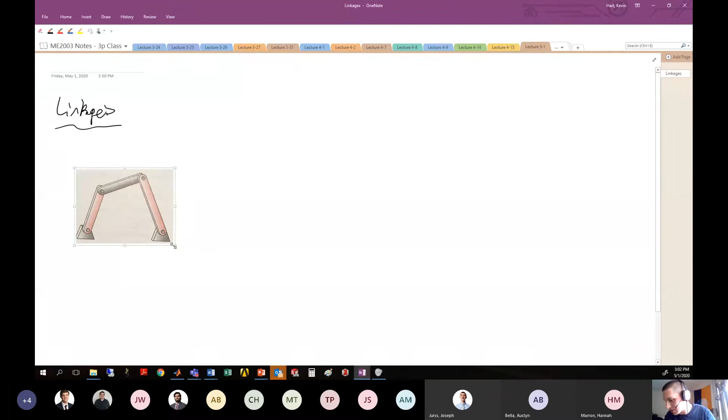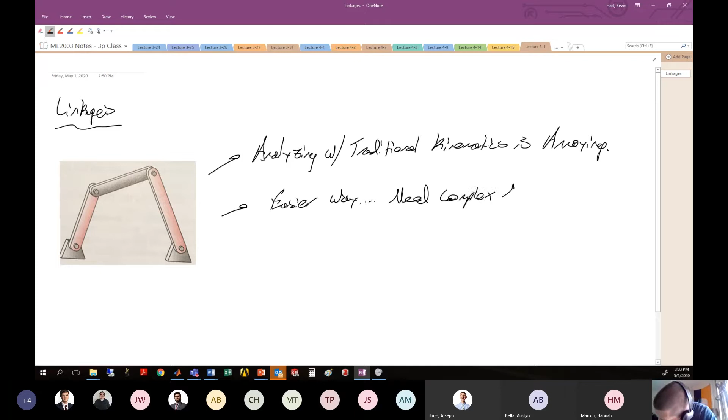Linkages. Remember what linkages look like. Just to jog your memory, we're looking at something generally like this. This is the most generic linkage you could think of. And we said that analyzing these with traditional kinematics is annoying, and as soon as we start adding links, it's going to be more annoying. So there's an easier way, but we need complex math. We had a lesson yesterday on complex math and how we might define position, velocity, and acceleration using complex notation. So here's a quick review.

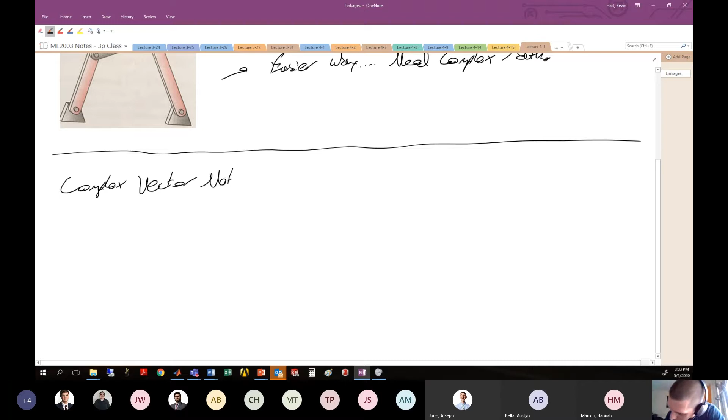The complex vector notation takes place in the complex plane, which looks a lot like your traditional Cartesian XY coordinate system, except now we replace the x-axis with the real axis and the y-axis with the imaginary axis. So if we have 2 points, point A and point B, and we want the position vector that locates B from A, let's say that is this vector here.

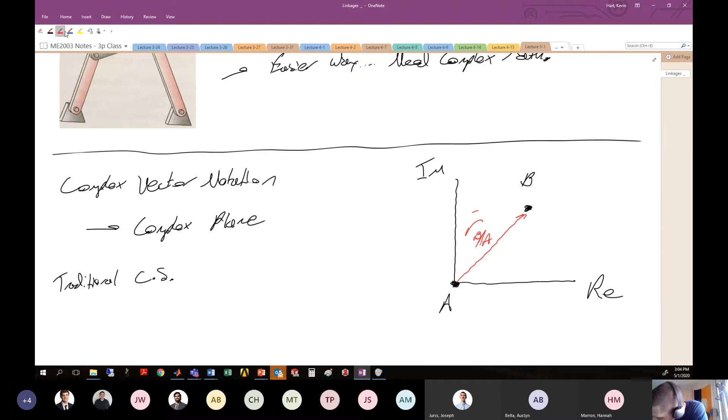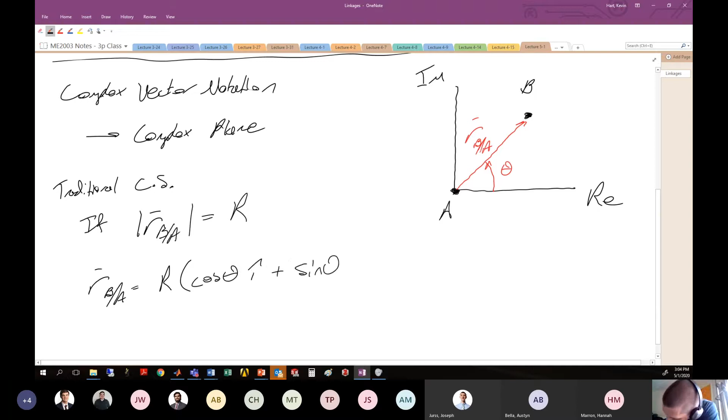Then in a traditional coordinate system, if the angle with the horizontal is theta, and the magnitude of this position vector is capital R, then the position vector which locates B from A is R times cosine theta I hat plus sine theta J hat. And everyone's happy. The world is good. And when we move to complex notation, it ain't that hard, right?

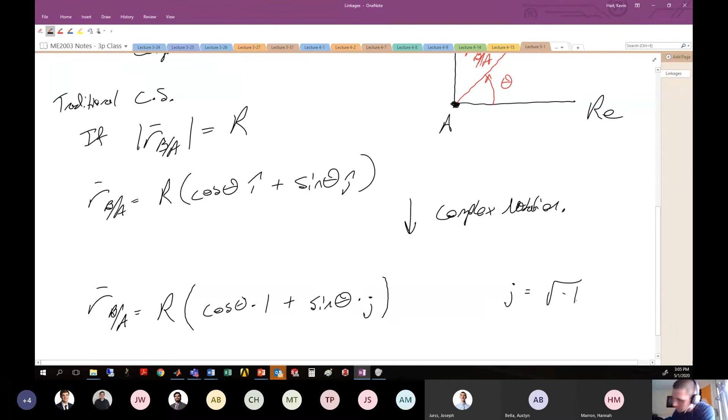All we have to do is replace the I direction with the value of 1 and replace the J hat direction with the J variable, which is the imaginary unit. So here, RBA has the same magnitude R, except it's cosine theta times 1 plus sine theta times the unit vector representing the imaginary direction, which is j, where j is equal to square root of -1. We use j in this class because your book uses j. Not the best reason, but that is what we do.

So this was our complex vector notation with real and imaginary components. We can rewrite this using Euler's formula. If you took anything away from lecture yesterday, I hope it was Euler's formula: e to the j theta is equal to cosine theta plus j sine theta. With that rewrite, the position vector locating B from A is the magnitude r times e to the j theta. This was our most simplistic complex vector notation. Is that an oxymoron? Simple complex notation.

All right, specifically for a position vector. So there we were. A position vector that locates B from A is the magnitude of that vector multiplied by e to the j theta, where theta is the angle that that vector makes with the horizontal. Now, this looks a lot like polar coordinates, and so if you've got a lot of experience with polar coordinates and you like polar coordinates, then this should look comforting to you or similar in scope to polar coordinates.

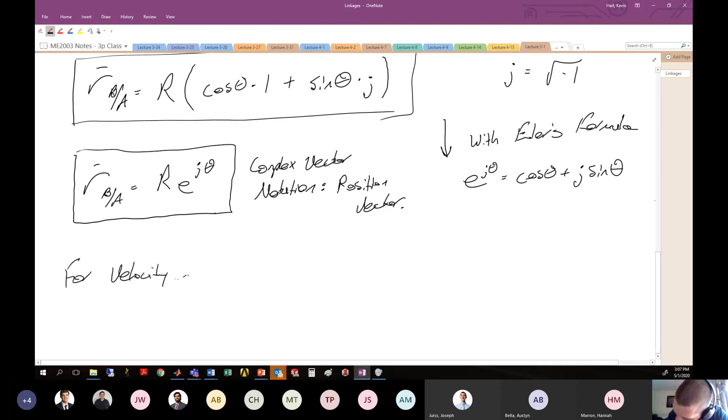So now we want to move from position vector to velocity. So for velocity, we take this guy and we take the derivative with respect to time. And the time derivative of this guy is easy. That's why we write it in this particular notation, because the derivative of an exponential is simple. So then we have the velocity of B relative to A is the derivative of this guy, which looks something like R j e to the j theta. And by the chain rule, there's a theta dot hanging on the back end here.

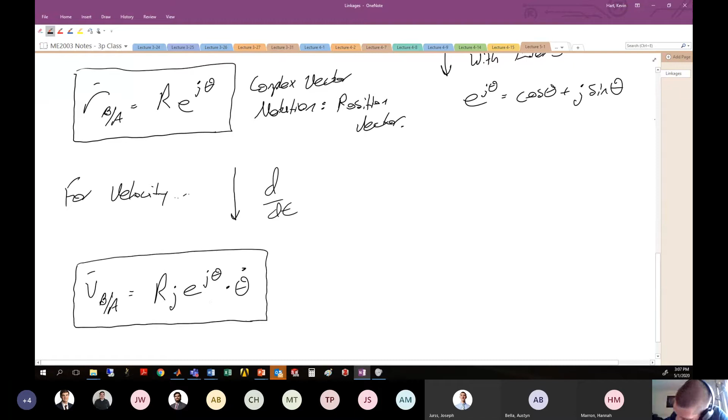So this was the velocity vector. And here we have the magnitude, R times theta dot, which looks a lot like R omega. So that's your magnitude. And then our direction is given by all of this mumble jumble here. So it is a vector. It has magnitude and direction, though it doesn't look like a traditional vector that you might be used to.

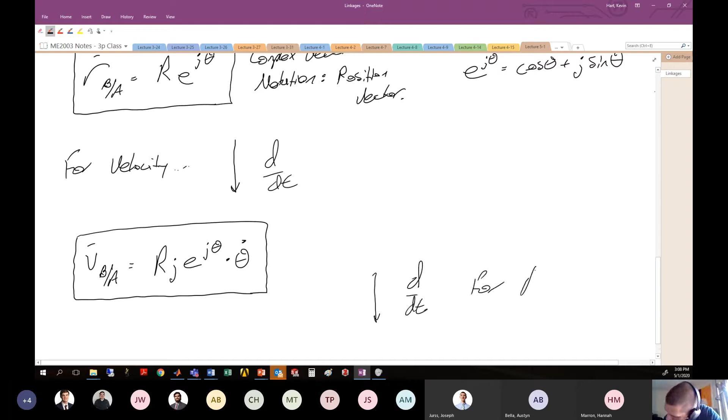Take one more derivative for acceleration. So we could then write that the acceleration of B relative to A, after doing this derivative, looks something like R theta double dot times j e to the j theta minus R theta dot squared e to the j theta.

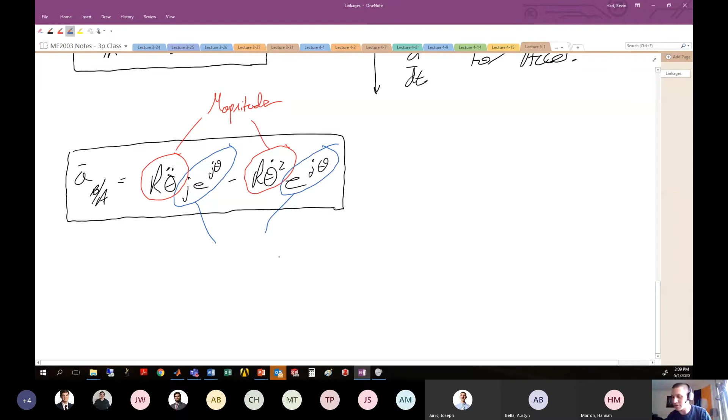And this was our complex vector notation for the acceleration of B relative to A. Notice here that this also has magnitude and direction. Here is your magnitude. Here is your magnitude. And here is what would define your direction. So there's that. You can also notice in this particular equation that there are flavors of things that you saw with your kinematics. What do I mean by that?

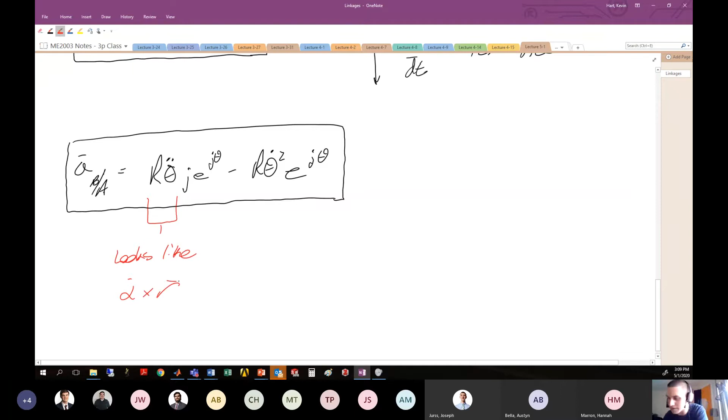You can also see here that this guy here looks like alpha cross r. So the magnitude of alpha is theta double dot, magnitude of r is capital R. And this looks like omega cross omega cross r. So remember, the magnitude of omega is theta dot. The magnitude of r is capital R. So we have capital R times theta dot squared, which would come from that particular component.

So we have this tangential term and this centripetal term that still pop their heads up. Though it looks funky because it's in this complex vector notation, I promise you that everything is there. So that was the lesson that we went through yesterday. All of these things will be useful when we go towards looking at the analysis of our linkages. So let's dive in on linkage analysis.

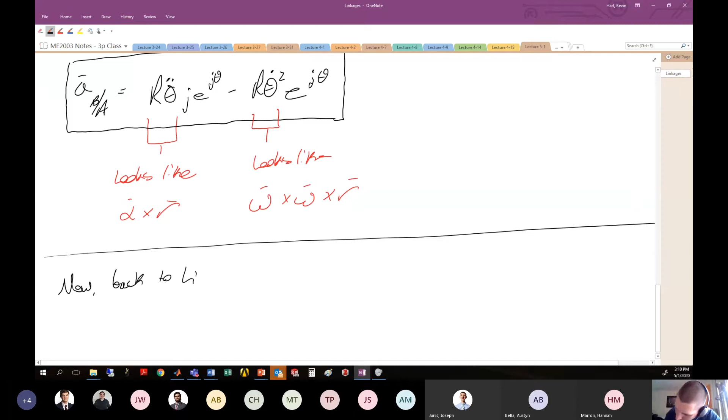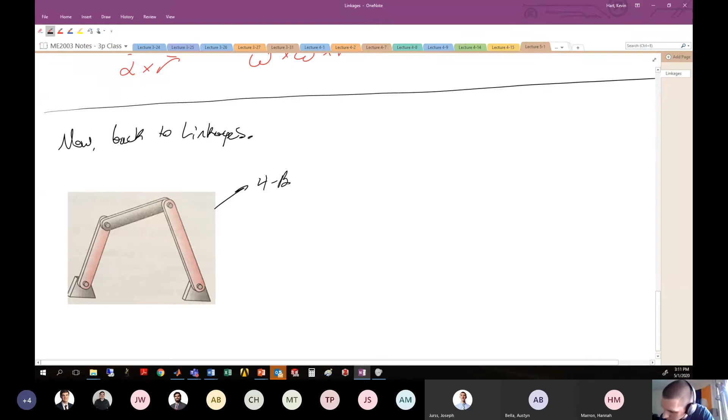Now back to linkages. And remember what our linkage looks like. This here is a 4-bar linkage. And in this class, we're going to stick with analysis of 4-bar linkages. You look at this and you say, what the F? This has only 3 links. Why is it called a 4-bar linkage?

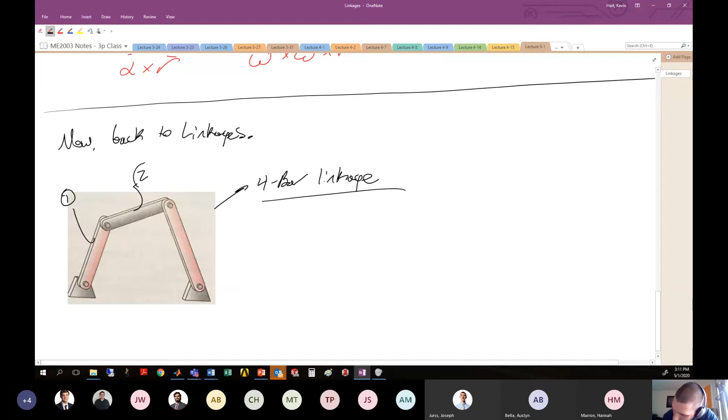Well, it's kind of a nomenclature thing. The links that we have here are, obviously, link number 1, link number 2, and link number 3. And by convention, the way that we define the 4th link is the link that exists between the 2 fixed points. So we have to imagine that there's a 4th link in this system that exists between these 2 points, and that is link number 4. So when I said 4-bar linkage, there's this imaginary 4th link. So 3 free links, and 1 fixed between pins. This is a 4-bar linkage.

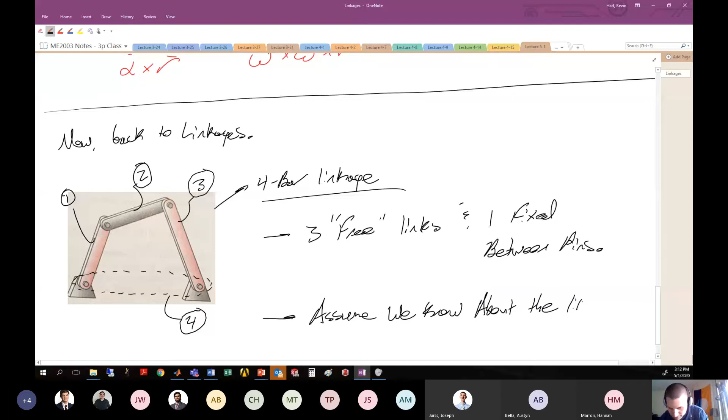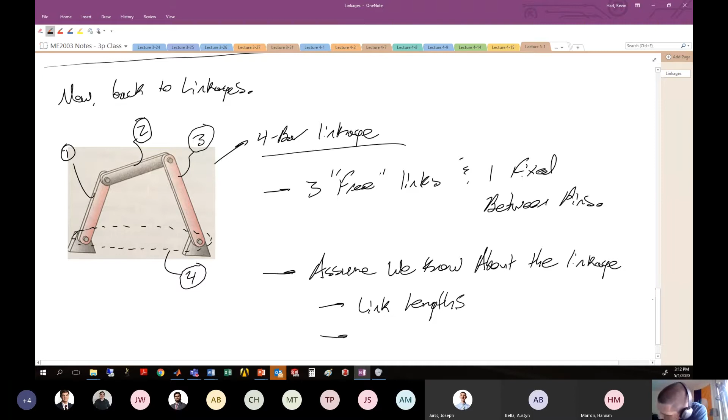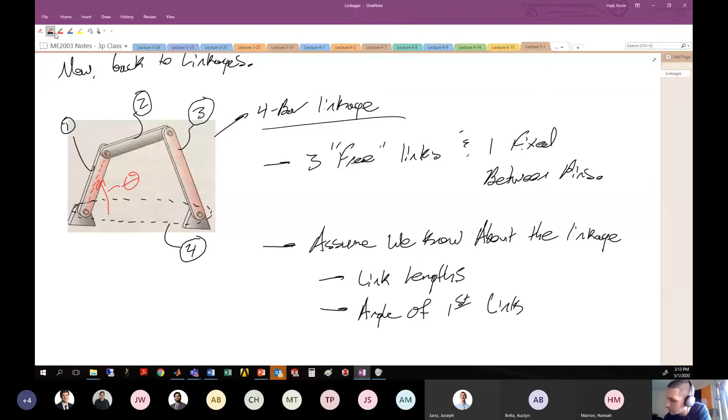Usually with these linkages, we will assume we know the following about the linkage. We'll assume we know the link lengths. We're going to know the angle of the first link. So that is the angle that this particular link makes with the horizontal, this angle theta. We're going to assume that we know what that is, usually because that particular link is being driven by a motor. We'll also assume that we know the angular velocity and acceleration of the first link.

Right. The reason that we can assume that we know these things is because usually the first link is driven by a motor of some kind. All right, so what I mean is this link in the chain, this guy here, is usually driven by some motor. And if you remember back to our examples before,

we saw that to be true with the motor example from way back in the day, which was here. So remember one of the linkages that we did way back in week number 3. In this situation, we had that exact scenario. We were assuming that this link AB was being driven by some motor. So we knew that this had some angular velocity here that was given in the problem. And we're also given its particular snapshot in time of what the angle was of this particular position vector RBA.

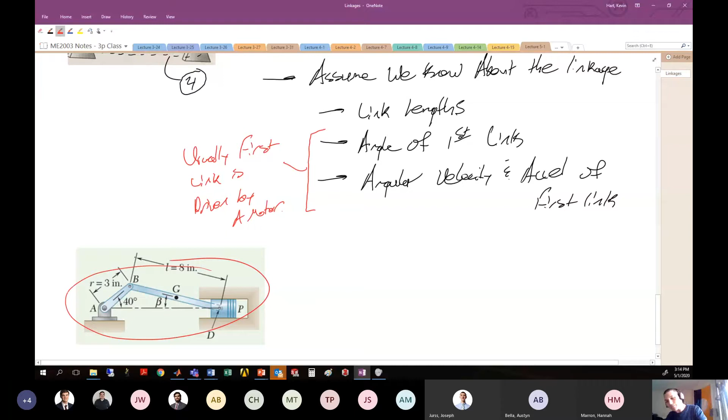All right. So that's how most of these systems work. And you'll notice here that this is a 4-bar linkage that is being used to drive this piston system, right?

So that is that. All right, now go away. Go away. Goodbye. All right.

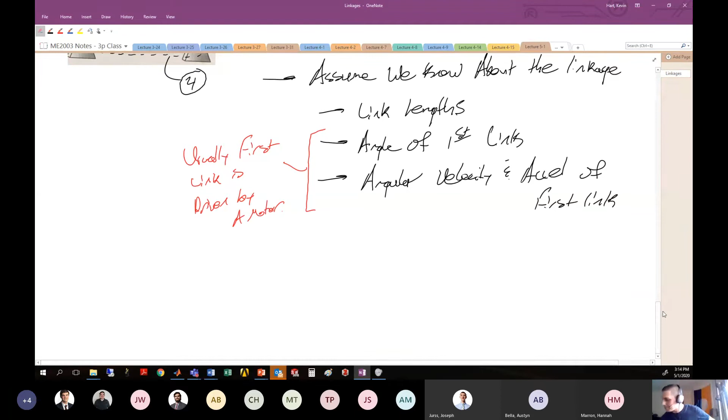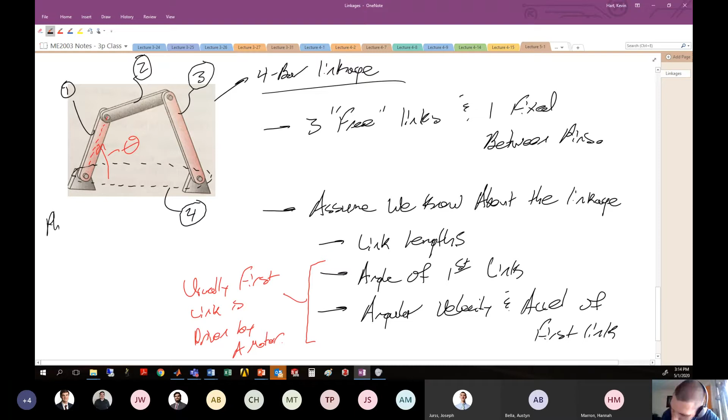So that's the idea. This is like a physical representation of what's happening. Now we actually need to come up with a mathematical model for what this looks like theoretically so that we can start to do some analysis on it. All right. So this is the physical system. Bang. Now we need a model. And that model of the system is going to be based in our real and imaginary coordinate system.

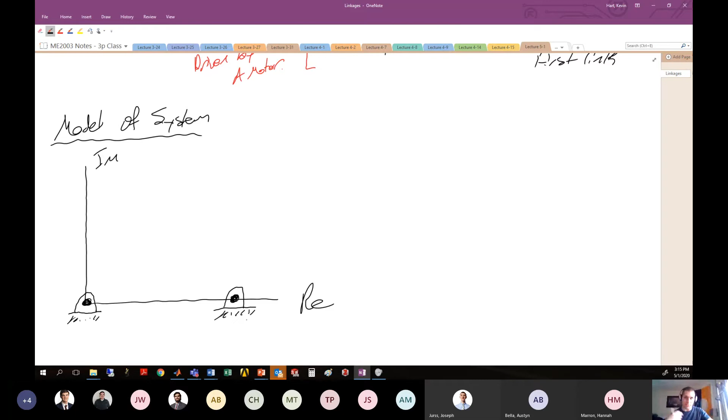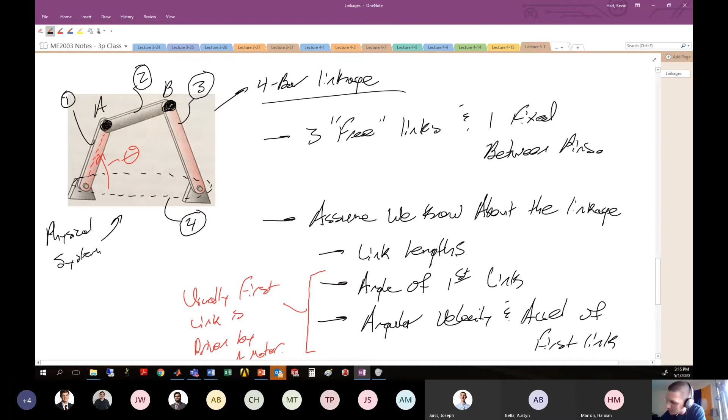All right. So down here at the bottom, this is where our first fixed point is assumed to be. We have another fixed point over here where everything ends up connecting. And then we have these arbitrary links that are in space. And the way that we're going to define these positions or these links in space is with position vectors. So if we go back up to this general linkage over here, and say that this is point A, and this here is point B, then we can define in space the points A and B appropriately. And we're going to define them in some generic general position.

So we can see here that we'll have some position vectors, like let's say here's a vector that locates A. We have a position vector that locates B from A. And we also have a position vector that locates B from this last final link here as well. All right, so these are all the vectors that we're going to use to do our analysis. So let's give some actual names to these guys. So let's say that this first vector here, going from the first origin to point A, is the position vector. By nomenclature, this is R2.

I'm going to try my best not to be annoyed, but whoever came up with the standard nomenclature for these linkages is just a dumbass. Okay, there's no other way to put it. Whoever defined how to define these position vectors and how to go through this nomenclature was just a freaking moron. So apologies for how these variables are defined, but they're horrible.

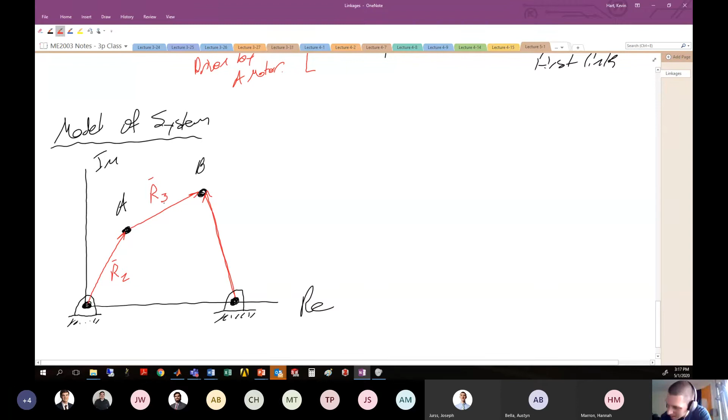So this is position vector 2, which locates A from this general origin. Here is position vector 3, which locates B from A. We have here, by nomenclature, position vector number 4. And you're asking, well, where's position vector number 1? Well, that is the position vector that locates the fixed secondary point from the fixed first point. So here we go. This is the position vector R1. Why they did it this way, the world will never know. So here are these position vectors.

I told you that we're going to assume that we know what the link lengths are. And by nomenclature, the links have the following lengths. The position vector R2 has link length little a. Oh, God, terrible. All right, the position vector R3 has link length little b. God, it just makes me laugh. The position vector R4 has link length little c, and the position vector R1 has link length little d.

Why? Like, why would you do it this way? Why does position vector R2 not have length little b? And position vector R3 have length little c? It just makes no freaking sense. Whoever did this was just on crack. I don't know what's going on with this. But this is the way that it is.

All right. So let's talk about it. The position vector R2 magnitude is equal to little a. Position vector R3 magnitude is little b. Position vector R4 magnitude is little c, and the position vector R1 magnitude is little d. Obviously.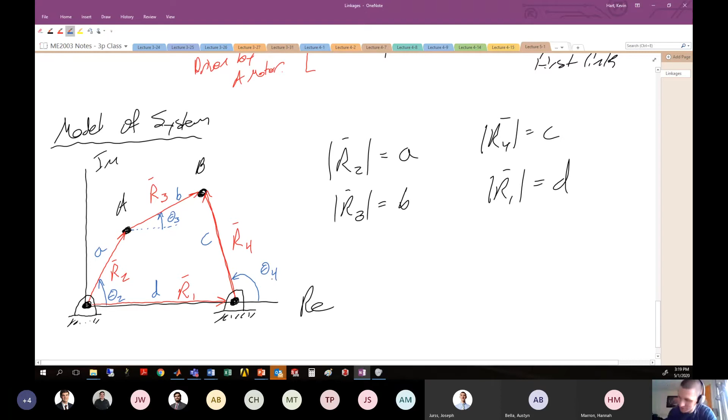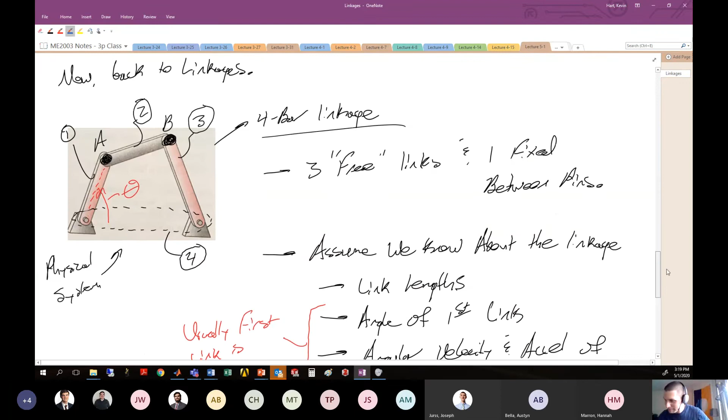And we'll also make one last note here: the position vector R1 has theta 1, which is always equal to 0. So this is always true. All right. So there we go. This is our model of this general linkage here. So any 4-bar linkage that you can create, this is your general model.

Let's take a look at that homework problem from way back. Let's go in the Wayback Machine and look at this homework problem. Don't try to write this down. I'm just going to talk through it. Here's the homework problem from the Wayback Machine. This is, in fact, a 4-bar linkage. Okay, you'll notice some strange things about this.

All right, this particular pin, as it's viewed in this image, is not on the same horizontal plane as this particular pin, right? So if you were actually going to do the analysis of this guy, you'd have to rotate this link in space.

I don't know if I can do it with this actual pen. Can I do it with this pen? I'm going to try, damn it. All right, can I rotate? How do I rotate? I can't rotate.

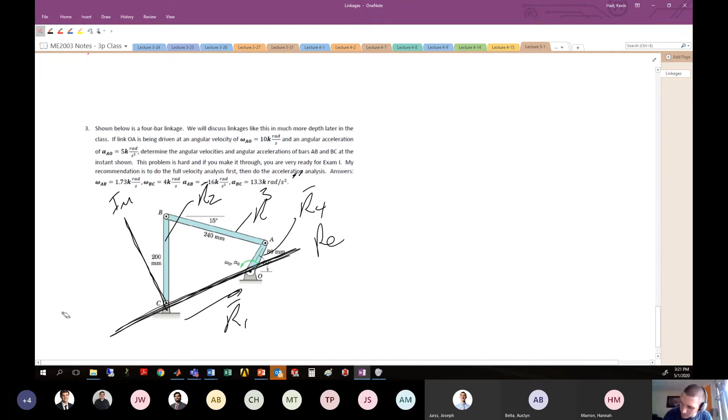But you get the idea: you'd have to rotate it so that the pins were on some plane that looked like this, where this was your real axis, and this would be your imaginary axis. So if you wanted to do a 4-bar linkage analysis on this guy, you could do that. Here this is your R2, this guy is R3, this guy is R4, and this guy is R1. All that stuff. So that's what you might want to think about doing.

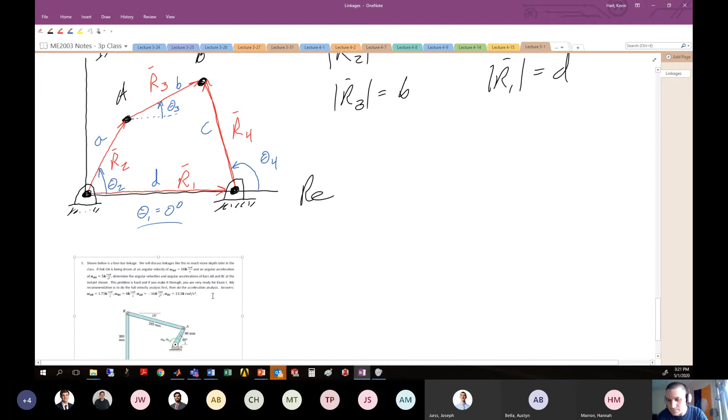Oh my gosh, what happened up here? Oh God. I lost it. No. Okay. Don't worry, I got it back.

So now let's take a look at this in a little bit more depth, and you'll notice that by vector algebra, the following is true: R2 plus R3 is equal to R1 plus R4. The way we've defined these vectors, R2 plus R3 gets you to location B. That's equal to R1 plus R4 getting you to location B. This is just standard vector algebra. Rearrange to R2 plus R3 minus R4 minus R1 equals 0.

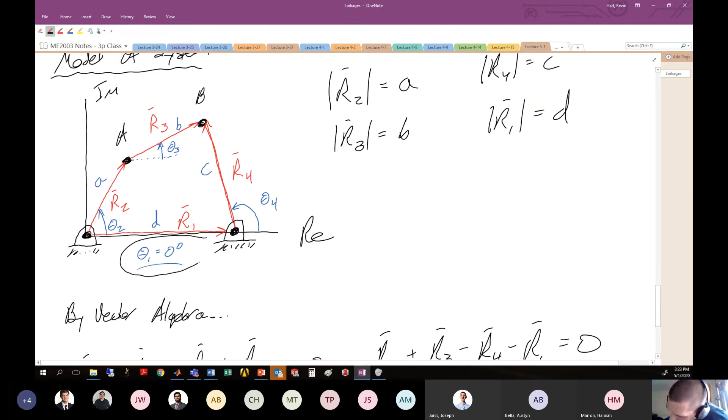We can write these using our complex notation. R2 has a magnitude of little a, so it'll be a e^(j theta 2). Obviously, a goes with theta 2. Plus R3 has a link length of b, b e^(j theta 3), minus c e^(j theta 4), minus d e^(j theta 1), all equal to 0. We know theta 1, by the definition of our model, is the angle between these two fixed pins, equal to 0.

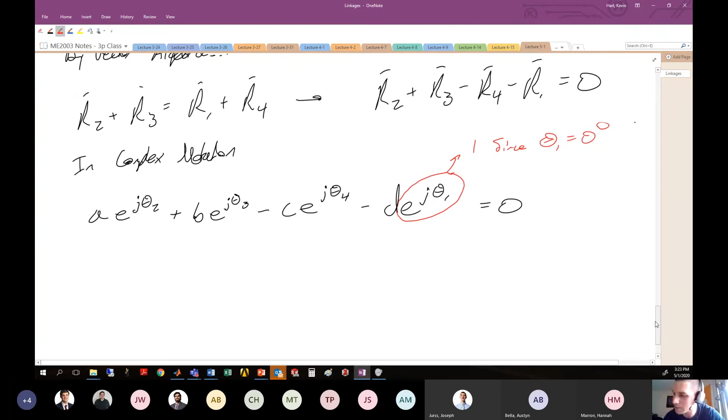So if theta 1 is equal to 0, this term is what value? If you say 0, I'm going to be irritated. This goes to 1. E to the 0 is 1. Don't write e to the 0 as 0. Don't be a freshman, all right? You're not a freshman anymore. E to the 0 is 1, since theta 1 is 0 degrees. We write a e^(j theta 2) plus b e^(j theta 3) minus c e^(j theta 4) minus d equals 0. Here's our expression.

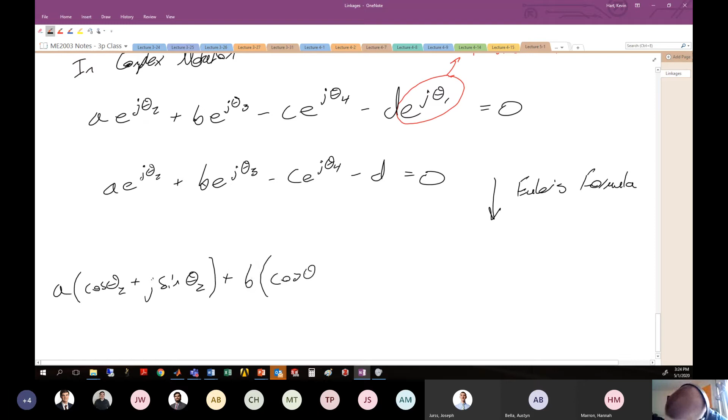Let's substitute back using Euler's formula to dive in a little deeper. With Euler's formula, we have a times (cosine theta 2 plus j sine theta 2) plus b times (cosine theta 3 plus j sine theta 3) minus c (cosine theta 4 plus j sine theta 4) minus d equals 0.

This is a vector equation. Notice that we have a real portion and an imaginary portion, so this is actually two equations. It's like i and j components. The real components look like this: a cosine theta 2 plus b cosine theta 3 minus c times cosine theta 4, with a multiplication sign here since it's difficult to tell, minus d equal to 0.

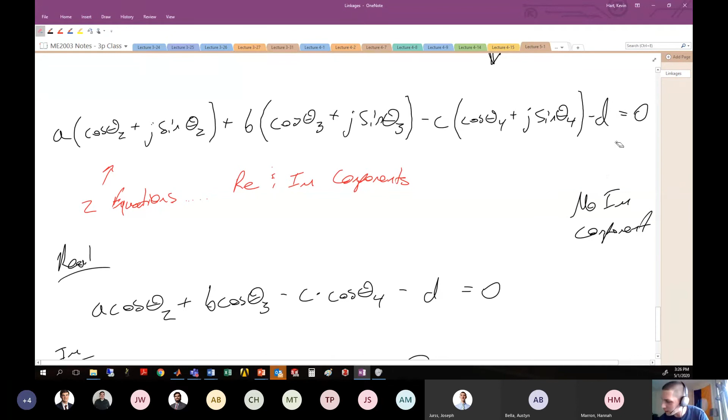Also, we have the imaginary portion, which is a sine theta 2 plus b sine theta 3 minus c sine theta 4 equal to 0. Notice that this portion doesn't have any imaginary component. There's no j hanging out for the fourth link, or what would be the first link, related to d. So we have these two equations, and they come from the vector equation above. Let's recall what we have available to us.

We know the following. Can I slide this over? Yes. We know link lengths. That is A, B, C, and D. We're going to assume that we know what those are, that those are provided. All right. We also know what's known as the driving angle, which is theta 2. These are all the things that we know. So if we know theta 2, we know all the link lengths. The only unknowns in these series of two equations are the values of theta 3 and theta 4.

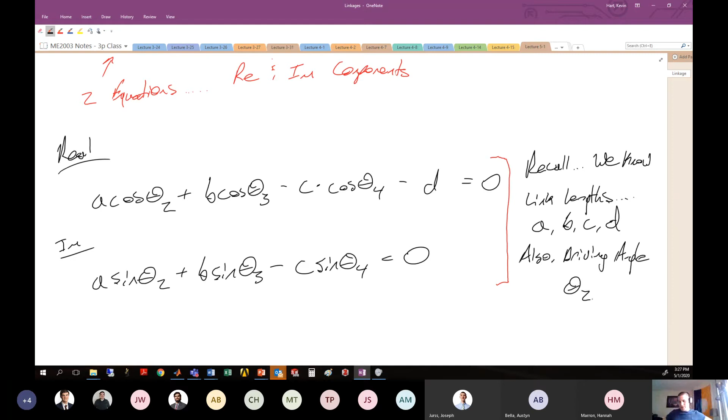What does that correspond to for our particular linkage? All right. So in this particular linkage setup, we know link length A, link length D, link length B, link length C. We know all of those things. Right? You got the links. They're physical links. They are whatever length they are. Right? You also assume that we know this driving angle here, theta 2, because we're assuming that that first link in the chain is being driven by some motor. Okay, that's just the general assumption.

What we need to solve for then is what is the angle of this third link in the chain, and what is the angle of this fourth link in the chain? Right? That's what we're looking for. How are the other links positionally related to the first link, given some information about the various link lengths and the driving angle of that first link? Right? So we need theta 3 and theta 4.

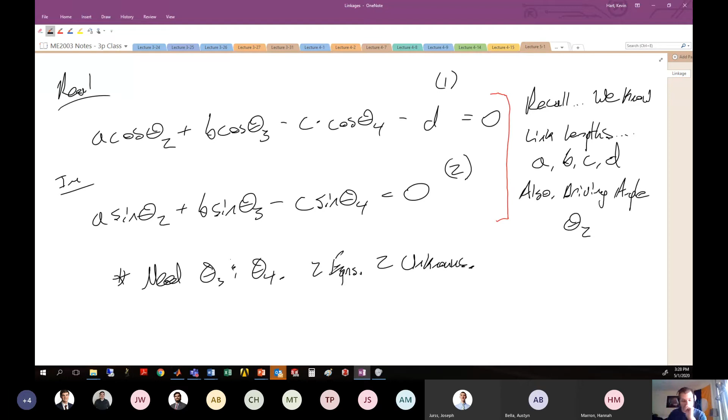All right. Fortunately, we have two equations and two unknowns. Unfortunately, these equations are freaking complicated. Okay. So here's like equation 1. And here's equation 2. Who wants to go through those equations and solve for theta 3 and theta 4? Yeah, I don't. Dang, that would be so much algebra. All right. Lots of algebra.

I'll cut to the chase. People smarter and more patient than me have done this. And so you have two equations, you have two unknowns. You can solve one equation for one of the variables, plug it into the other equation, solve for the variable, and you're going to get stuff that pops out. That stuff, complicated. Mostly because these trig functions and then working with other trig functions together with some constants floating around, not fun. Okay, not my favorite exercise. This is like the little girl in the meme crying over her homework. Oh, this is horrible. All right. So let's cut to the chase.

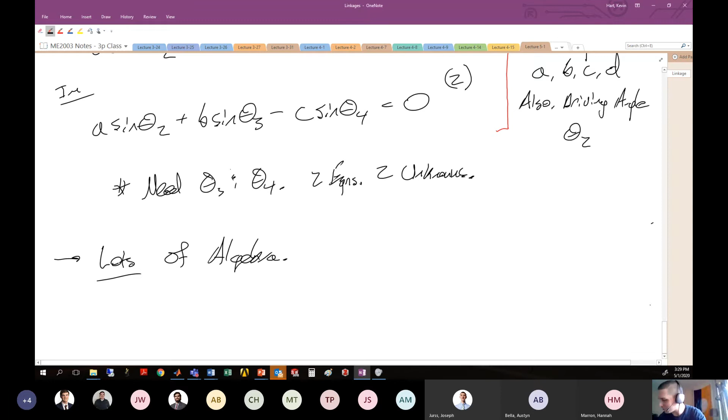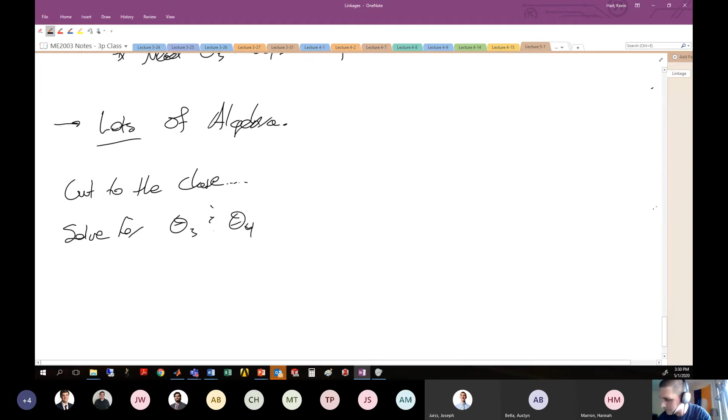And here we're going to solve for theta 3 and theta 4. Are you ready? Here we go. Two solutions possible for each of theta 3 and theta 4. You'll see that there's a quadratic equation that pops up in the solutions for these particular guys, and that's just the way that this ends up working out. Okay. So there will be a quadratic that forms.

You guys hear like the guy revving his engine outside? Annoying.

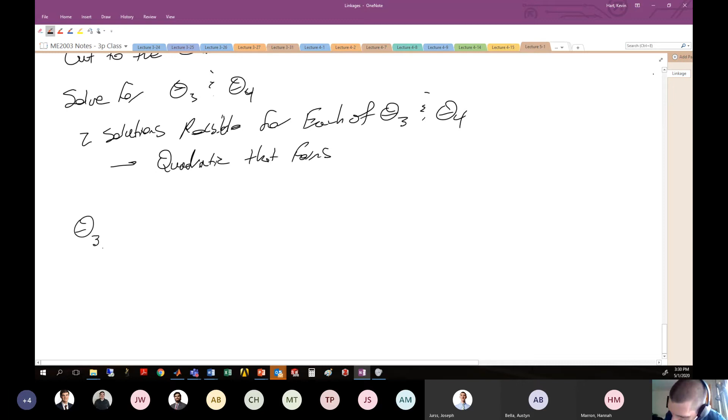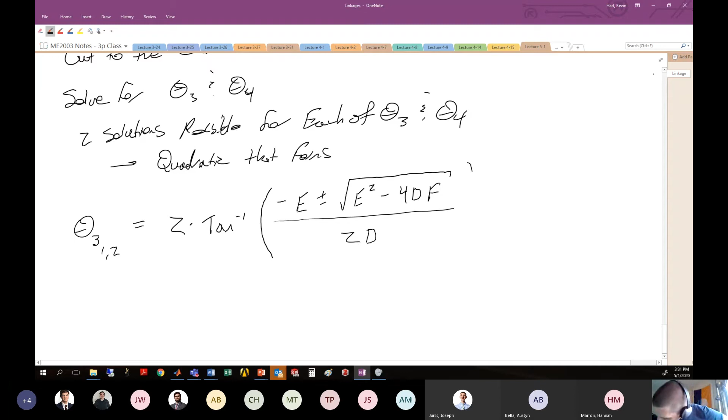So the solutions that result, start with theta 3. And like I said, there are two solutions. That's why I'm doing theta 3, subscript 1 and subscript 2, for the two possible solutions that form. Here it's going to be 2 times Tuesday. No, I'm just kidding. 2 times the tangent inverse of the following expression: opposite of capital E. Yes, this is an E. Plus or minus square root of capital E squared minus 4 times capital D times capital F. Don't worry, this will all make sense in a moment. All over 2 times capital D. All right, there's your solution for theta 3. I'll define these constants E, D, and F in just a second.

Similarly, for theta 4, could have 1 or 2. Like I said, there's 2 possible solutions. 2 times inverse tangent. God, this guy needs to go on with his car, man. It's annoying. Opposite of B, plus or minus square root of, everybody say it with me, B squared minus 4AC, all over 2 times capital A. All right. So there are your solutions for theta 3 and theta 4.

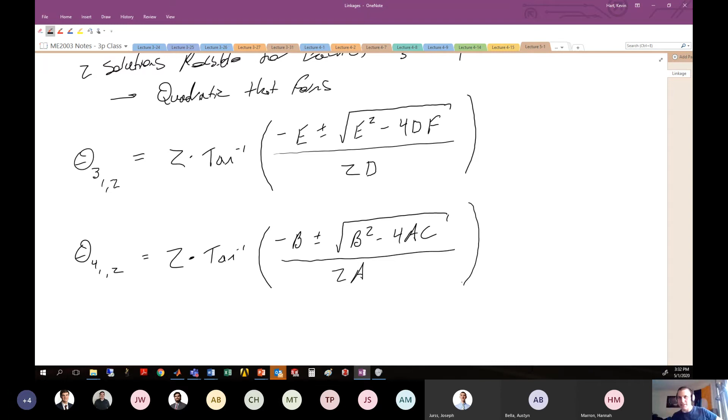Cumbersome and annoying. You're going to ask then, what are these variables, A through F, and what do the two solutions of theta 3 and theta 4 correspond to physically? Okay, so those are the questions that you should have in your head.

All right, we'll get to that in a second. Let's define what these variables A through F are. And I told you that algebra was annoying. You're about to see how annoying. All right.

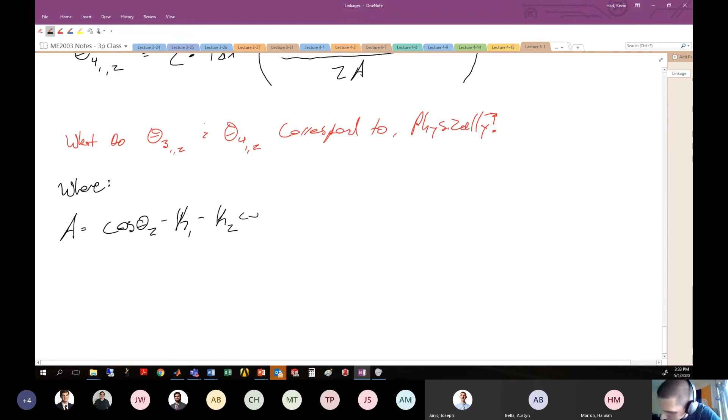Capital A is cosine theta 2 minus, yes, a new variable, K1 minus K2 times cosine theta 2, plus K3, where we have the following. K1 is equal to little d on little a. These are link lengths, little d and little a. K2 is little d on little c. Okay, so these are link lengths, little d and little c.

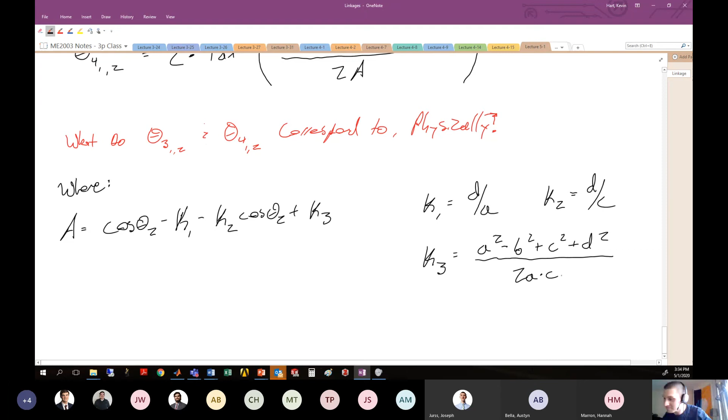And then we have here K3 is this crazy thing. Link length a squared minus link length b squared plus link length c squared plus link length d squared, all over 2 times link length a times link length c. Just what you thought it was going to be. Capital B, negative 2 times the sine of theta 2. That one's easier. Capital C.

You guys are used to capital C. Oh, burn on your grade. Oh, I'm just kidding.

K1 minus K2 plus 1 times cosine theta 2, and this is plus K3. And remember, these definitions of K1, K2, and K3 kind of feed into this expression over here. All right, so those are A, B, and C, which are used to feed into the solution for theta 4. And then you also have capital D, capital E, and capital F, which feed into the solution for theta 3.

Capital D looks something like cosine theta 2 minus K1 plus K4 cosine theta 2 plus K5. Capital E is the same as capital B, which helps a little bit: -2 sine theta 2. And then last but not least, you have capital F, which you guys are all very familiar with.

Oh, just kidding. No one in this class is getting an F. Come on.

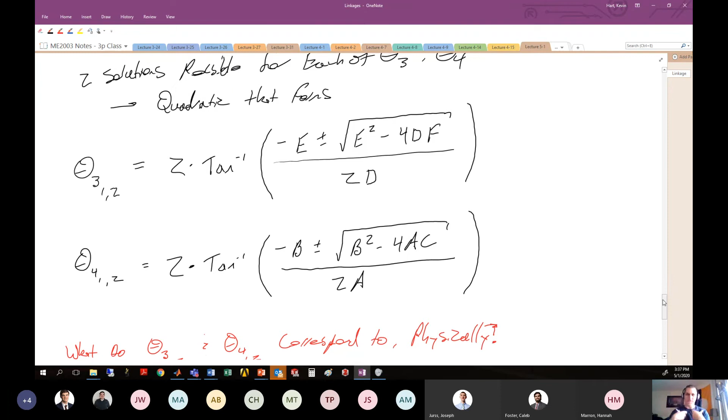So these are things that help us define the positions of each one of these particular links. Yeah, this is the easier method. Imagine trying to do this with kinematics. It would be harder than this. So this is all the general algebra that feeds into these equations up here. And remember, what we're after are these angular values, theta 3 and theta 4, of which we have two possible solutions. So what does it mean physically now that we've gotten all those constants out of the way? What does it mean physically to define the values theta 3 and theta 4?

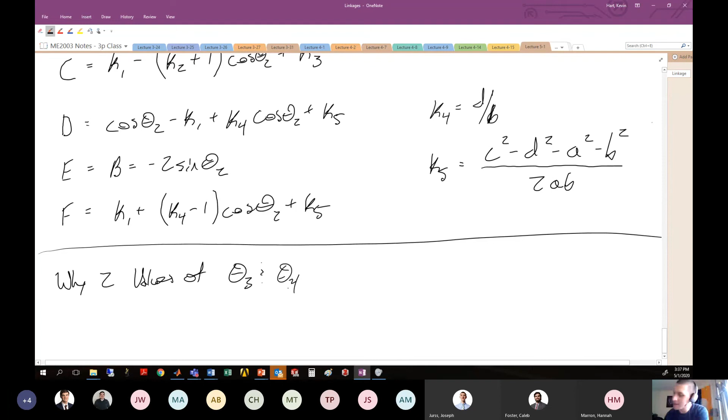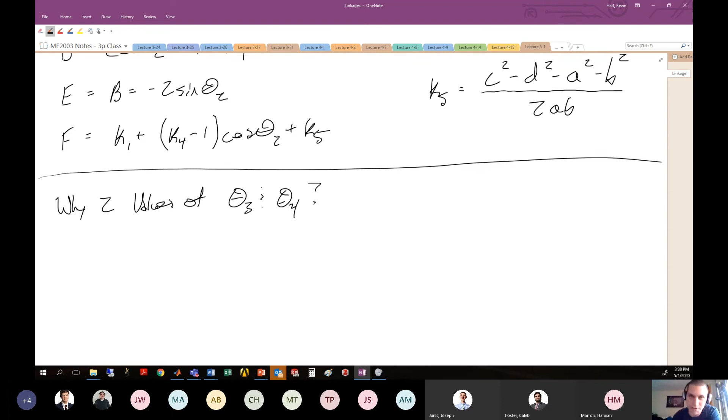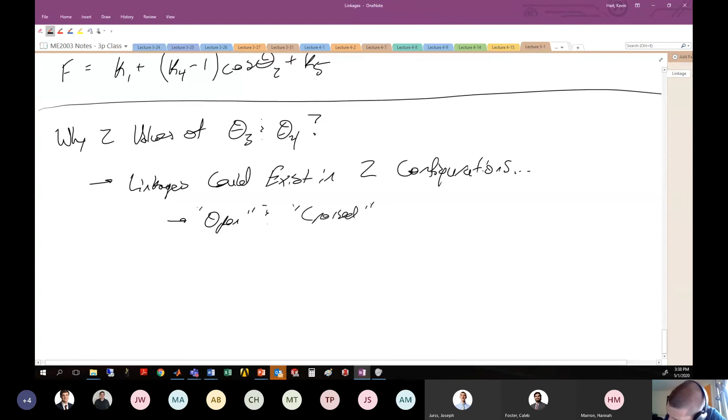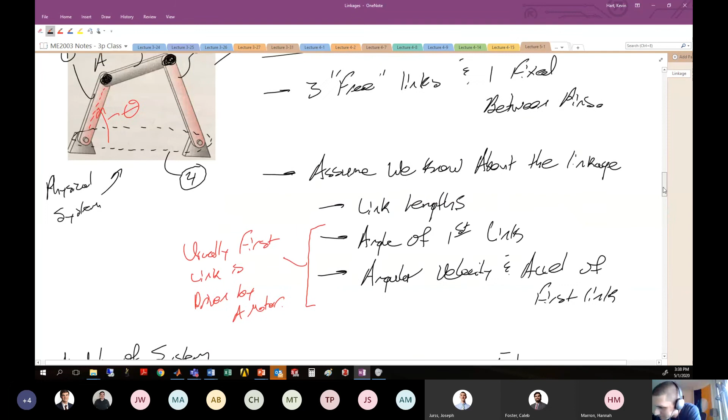That's because the linkages that we've drawn are all in what's known as the open configuration. But there is also a possibility for these linkages to exist in another configuration, which is known as the crossed configuration. And I will show you what I mean with a simple picture. We call them open and crossed. All of the things we've drawn so far are the open configuration. So if we go back up to our model, here's an open configuration. The picture that we showed before, here, open configuration.

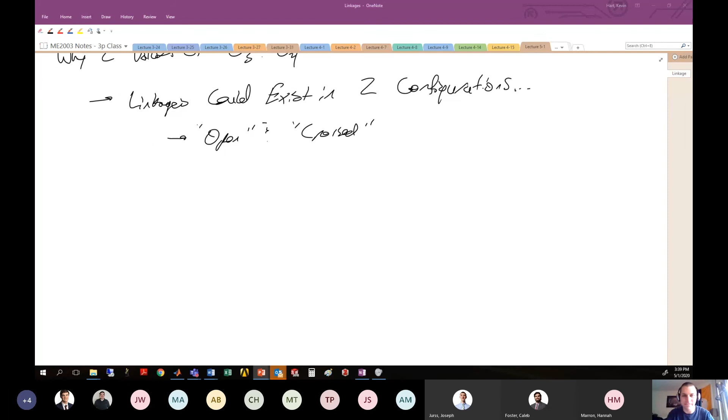Now, with the same driving link, the same value of theta 2, we could also have a situation where these links cross over each other, and we could have another configuration that's physically possible here. This is the crossed configuration. So with the same driving angle theta 2, the crossed configuration would give you this value of theta 4 and this value of theta 3, which are different than the open configuration, which still has the same driving angle theta 2. So this is how we get two different solutions for theta 3 and theta 4: one for the open configuration and one for the crossed configuration. Right?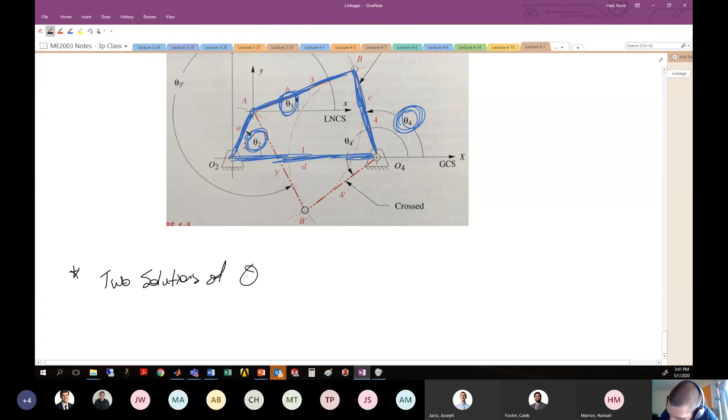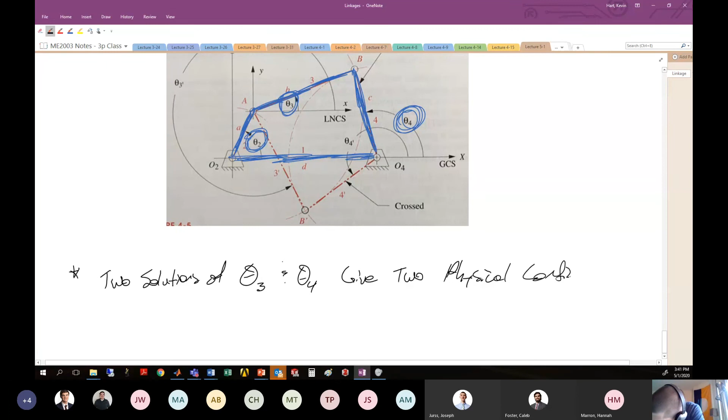Right? So there you go. The two solutions of theta 3 and theta 4 give these two physical configurations, this open configuration and this crossed configuration.

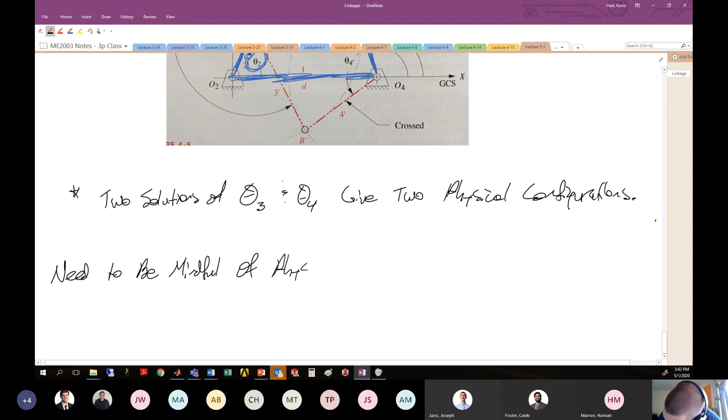Now, we have to be a little bit careful with our math, and that is because you could imagine a series of links that I hand to you, and I tell you, make me a 4-bar linkage out of these links, and you could have a situation where it is impossible for you to construct a 4-bar linkage given those particular links. Let me give you an example. I'll say, need to be mindful of physical possibilities.

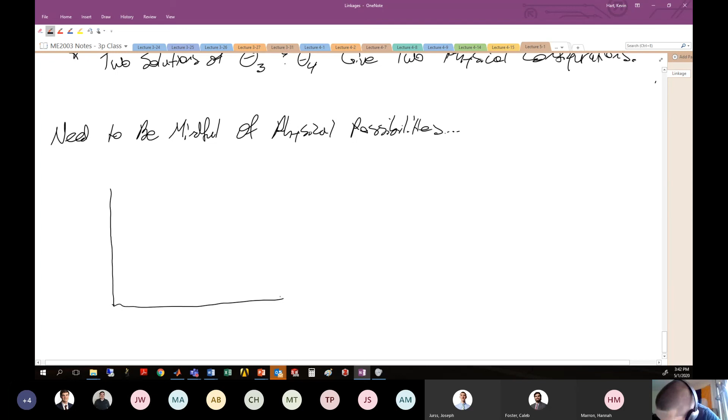So let's say I have this particular example where I give you a link or a series of links, and I say, okay, your distance from here to here.

Hold on, someone just knocked at my door. I don't think it's important, but maybe it is. All right, sorry, real life problems.

All right, let's continue. You could have this situation where there's this distance here that exists, this little d, that we know to be fixed. And let's say I give you 3 tiny little links that can't get you to point D. So I give you this particular link, this little link here, and maybe one more link here. There's no way that you can configure those links physically to get you out to point D.

So here you have some link length B, some C, and some A, or something like that you're trying to put together and form into a 4-bar linkage, but it's impossible. You can't do it. All right. So we should have mathematically the situation where if I give you those generic values of those linkages, the math should tell you that the solution does not exist. That's what you would hope for.

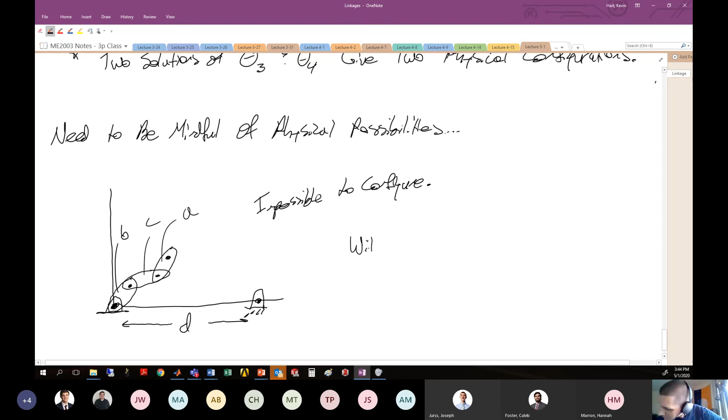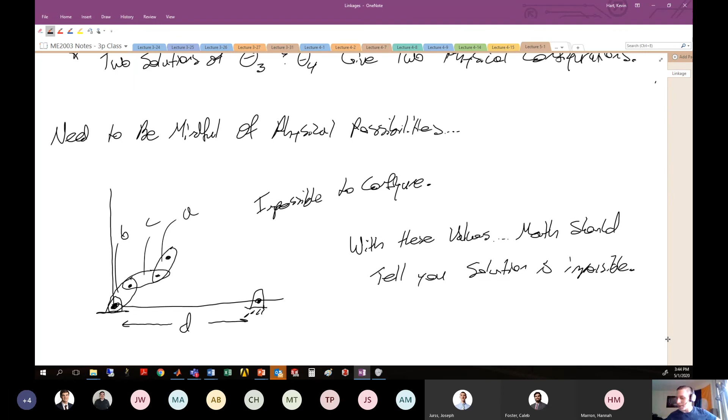All right. And what I'll say is those impossible solutions are captured by the quadratic formula. If we go back up here and we look at these equations, which are dictating for us the angle theta 3 and theta 4, which exists for this particular linkage system, we can see that we potentially have imaginary solutions if this portion or this portion ends up being negative.

If this e squared minus 4df is less than 0, we're going to have some imaginary solution. So we can capture this impossible physical configuration by observing an imaginary solution for theta 3 and theta 4. So let's look at what the possibilities are for theta 3 and theta 4.

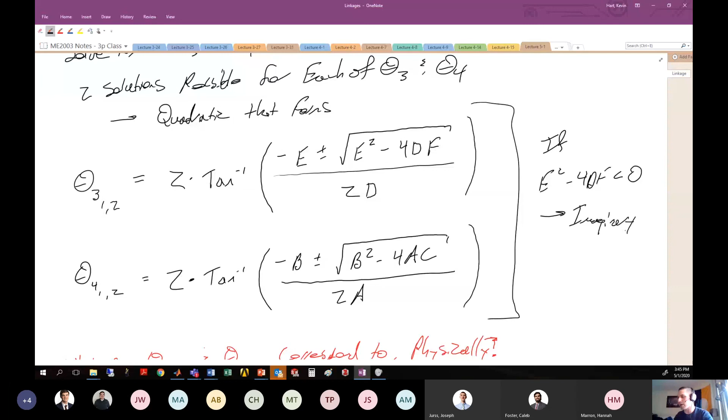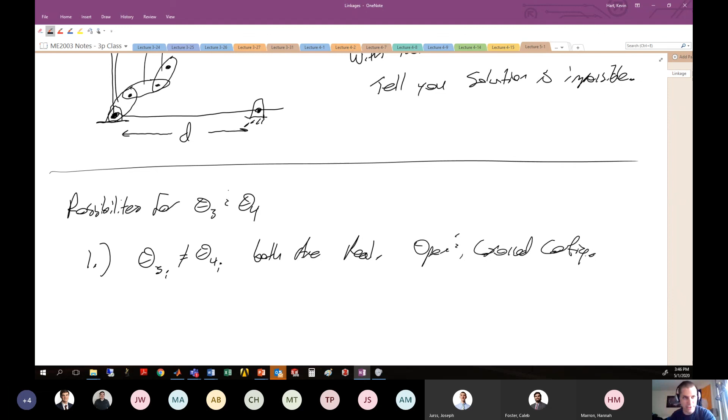Possibility number 1 is that theta 3i, so 1 and 2, is not equal to theta 4i, and both are real. This is your open and crossed configurations. All right, so that's possibility number 1. You solve these quadratic formulas, you solve for the angles theta 3,1 and 3,2, and theta 4,1 and 4,2, and you see that they're all real, none of them are equal to each other. Away you go. Open and crossed configurations for theta 3,1 matching theta 4,1, and theta 3,2 matching theta 4,2.

All right, another possibility. Theta 3i and theta 4i imaginary. If that is the case, no physical configuration of these links is possible.

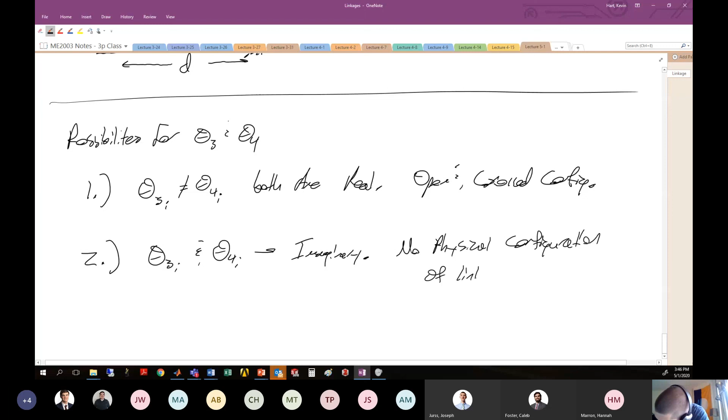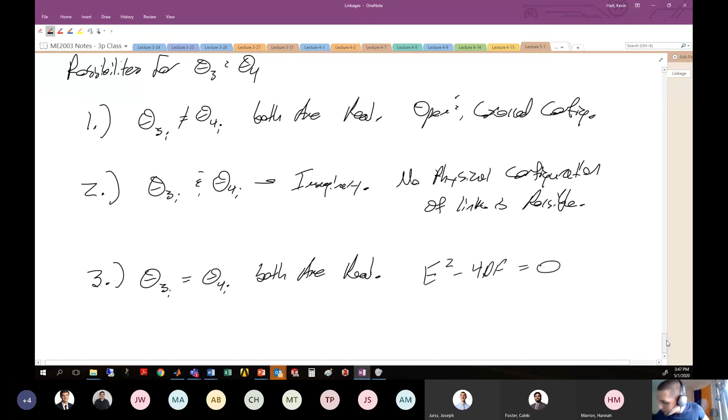All right. There's one more possible solution, and this one's a little bit more subtle. And that is theta 3i is equal to theta 4i, and both are real. Okay, so this is this e squared minus 4df, that portion of the solution being equal to 0. That would be that idea. You can show through that algebra that if that is the case, then it must be true that theta 3i equals theta 4i, and they must be equal to either 0 or 180 degrees.

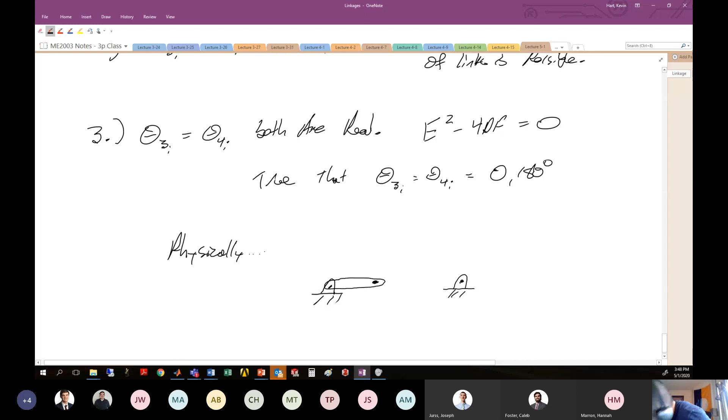Physically, what this looks like is that you have, again, these locations that are fixed here and here, and you have a configuration of your links that maybe looks something like this. All right, so maybe here is link number 1. Here's link number 2. And then here is link number 3. This is the only possible answer if theta 3 and theta 4 are equal to each other. So here, theta 3 equals theta 4 equals 0 degrees or 180 degrees.

All right, so that's your physical interpretation for the situation where the quadratic equation only responds back with one solution. There are no open and crossed configurations here. That's why there's only one solution, because there's no open configuration, no crossed configuration. There's only this flat configuration. Okay, so that's what it means if you get that additional solution.

All right, so that's it for the lecture today. Hopefully we learned something interesting about these linkages. We've really only talked about position at this point, and so starting with the beginning of next week, we'll dive into the velocity analysis for these guys, and things should start to clear up a little bit and become a little bit more interesting.